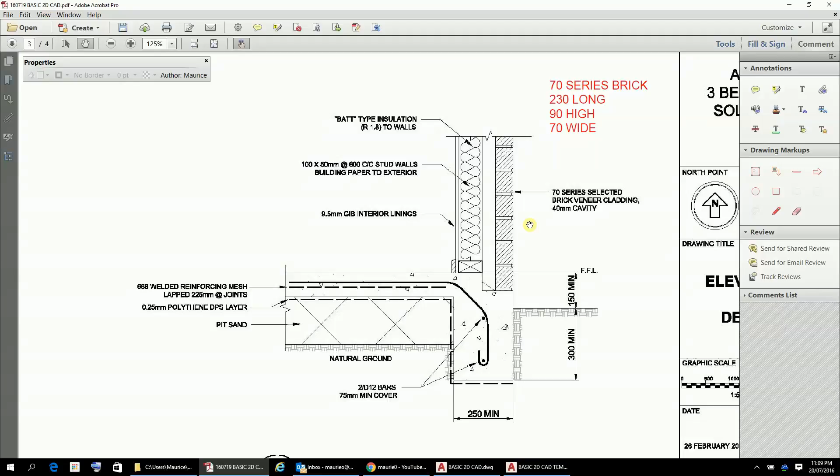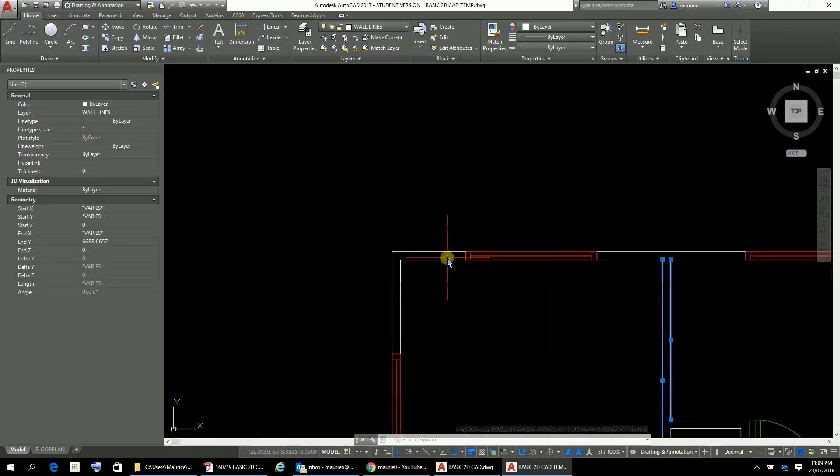So we need to start getting that into our drawing now, and here's our drawing. All right, so where to start? Probably we could look at our cavities here, and let's just see how we go. So let's just go offset, enter, and to do the cavity we're going to go with a 40 mil cavity. So there's 40.

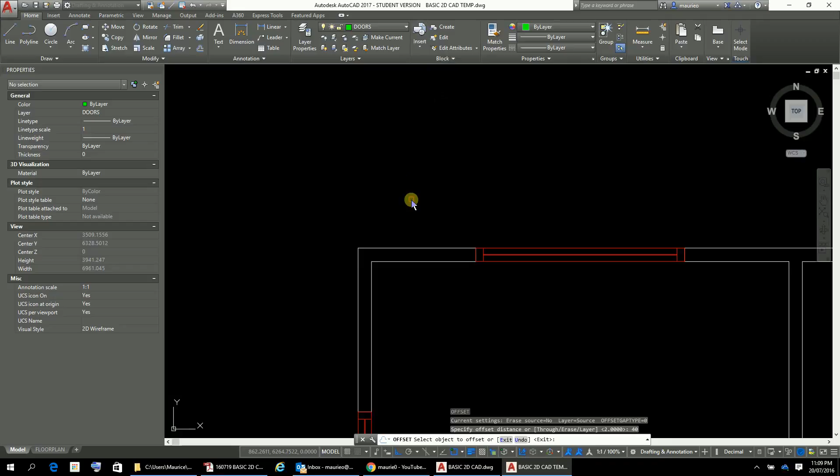Oh, before that, we don't really want our cavity in the door layer. So just before we start, let's start a new layer, and let's call it the brick layer, B-R-I-C-K, and we'll double click that, okay, and see how it's assimilated the properties of what was there. So we've got to watch that.

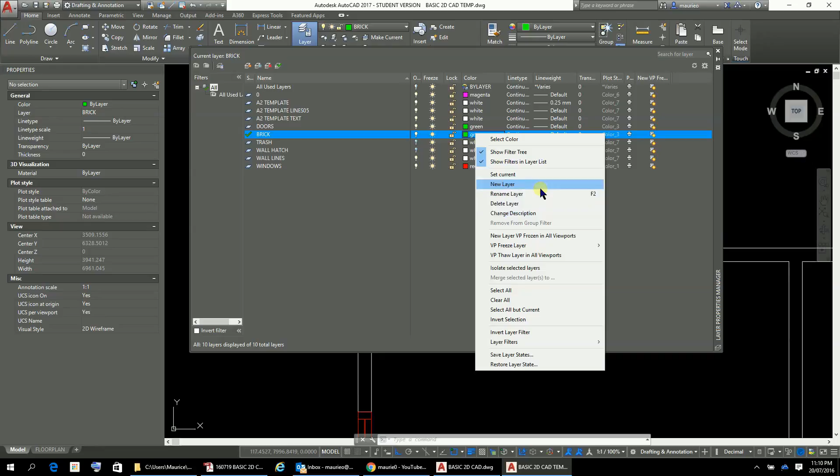So in terms of a colour for this, on black, a fairly strong colour is yellow, maybe, for our bricks. I really recommend that you just stick with these colours along here. They're the main ones. So let's just go with the yellow. So that's going to be our bricks. And we're going with the default line width there.

Okay, all good. So now, of course, when we offset, the offset always assumes the properties of the line that it offset, but we can soon sort that out anyway. So let's go offset, enter, and we've got 40 there. So that's our cavity there, and there's a cavity there, and we'll just deal with what we've got and get something going here like so.

So that's the cavity there that we're going to have, and now we've got to work out some way of dealing with that. So I imagine there's some sort of situation with the bricks and the cavity here. So we'll just put a line in here, we'll make that part of the brick layer, and we can decide what's going there.

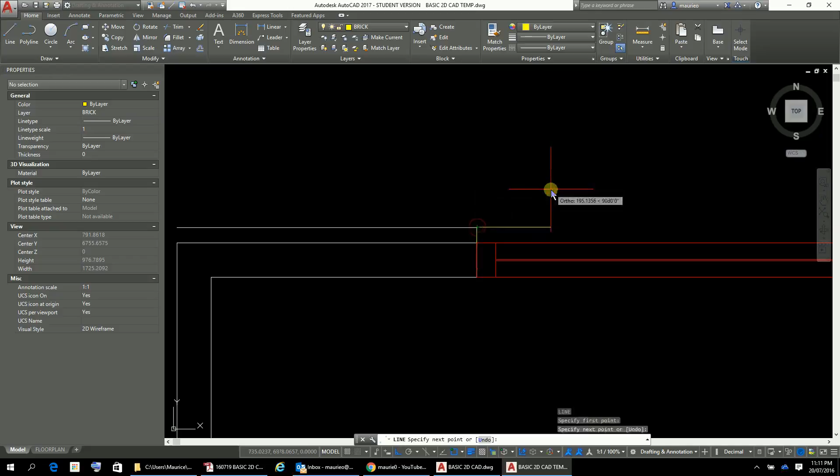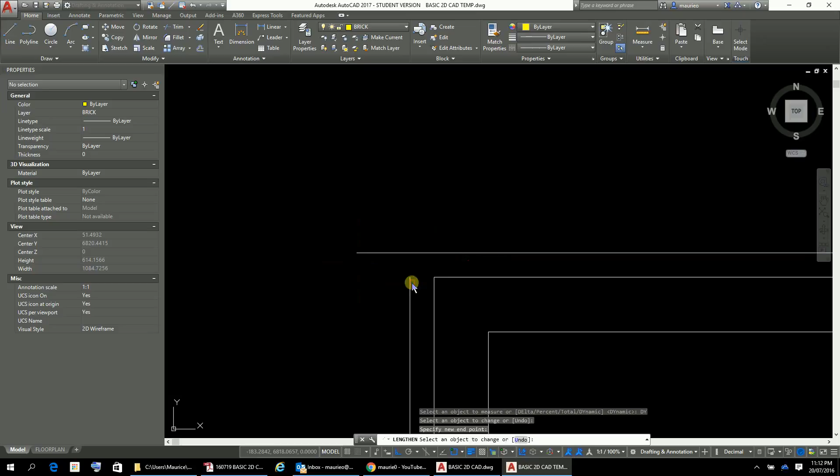Okay, so now we need to lengthen these ones, LEN, remember that, len and DY for dynamic, so we can just put these out here like that, and that one out there like that, and we'll just put a line across here, escape, line, which is going to be that one there.

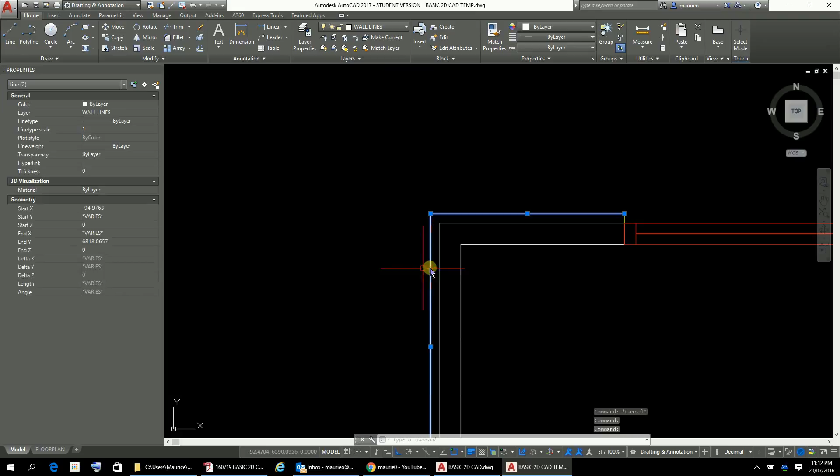Okay, and now let's just go trim, and let's trim out those two there. All good. Let's make these into our brick layer. So I'm assuming that what happens at the end there will be part of the brick. So let's just change that to brick. That's going to be our bricks in there.

And then we've got to offset that by the 70mm width of the brick. So offset, enter, 70, enter, and we'll just go there, there, there and there, and again we've got similar problems, line, enter here, like so, and line, enter here.

Then extend all that, len, dynamic here, so let's just pop that out there like that, pop that out there like that, and then let's just go trim like so, and boom, that's pretty much getting our cavities there as to how it's going to work. Things are pretty straightforward most of the way around.

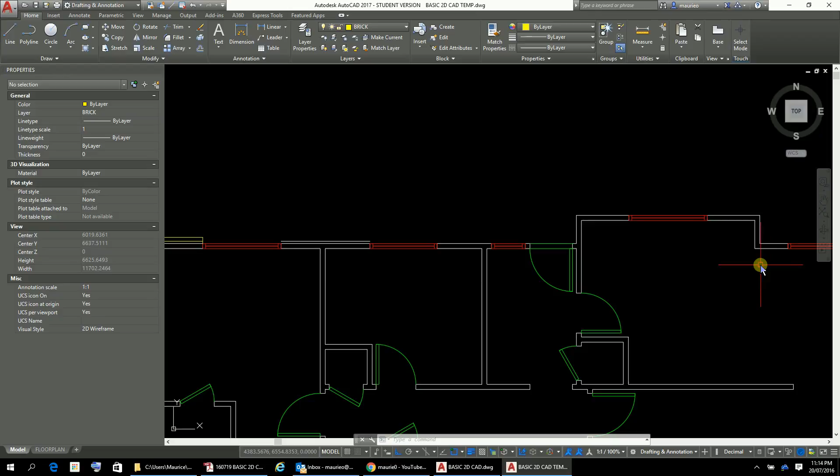Just remember that up here at the kitchen, the brick stops here, and this area here is in a Linea weatherboard. So at this stage we're not showing anything particular there, we're just showing the brick cavity, and we're leaving that as a push out to the roof line.

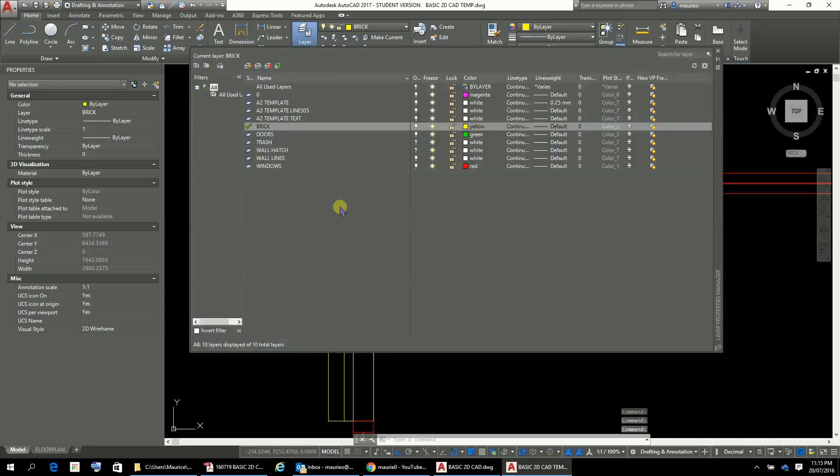So that's our cavity there, and then within that we want to put a hatch in there. Now these hatches can become pretty tricky, but what I'll do is, we've still got the brick, so I'll just create a new layer called the brick hatch. So let's just create a new layer there, and we'll call it the brick hatch.

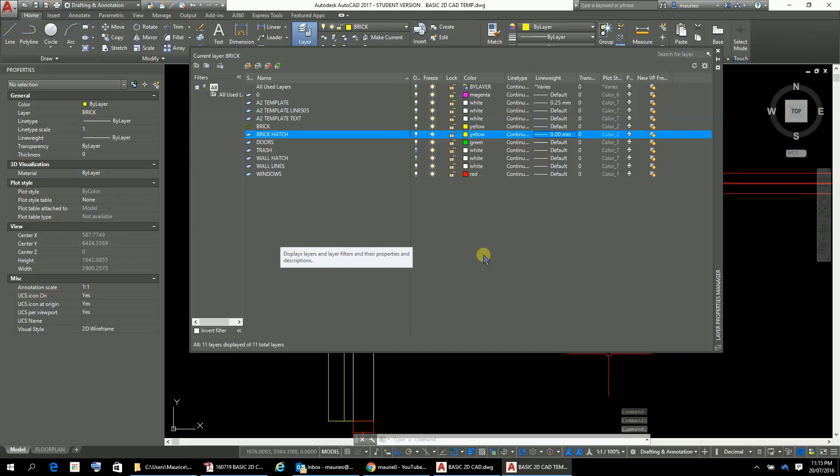The brick hatch. I like to get a real thin line for those. So for the brick hatch in that layer, I'm going to have a 0 there. So that should be a very skinny little line in there for the brick hatch. Okay, and then I'm going to make that the current layer, and then get rid of that there.

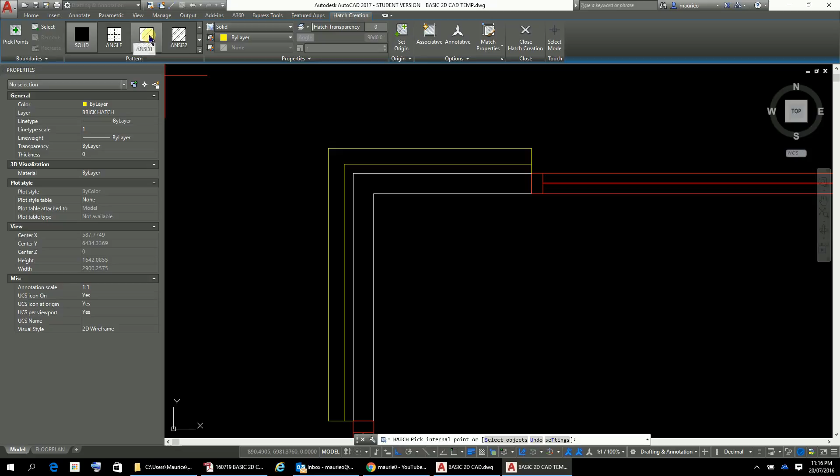So we want to put a hatch in here, and it's pretty much like a 45-degree line. So let's go in here for hatch, and let's see if we can select a hatch. So that's probably the one that we want there, that little hatch there, and we'll just click in there. And as you can see, the lines are a bit skinny there, and so what we need to do is to work on the scale of it.

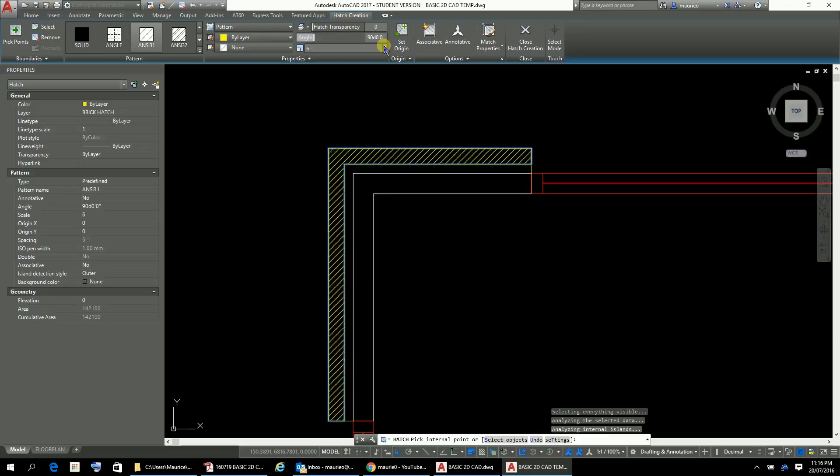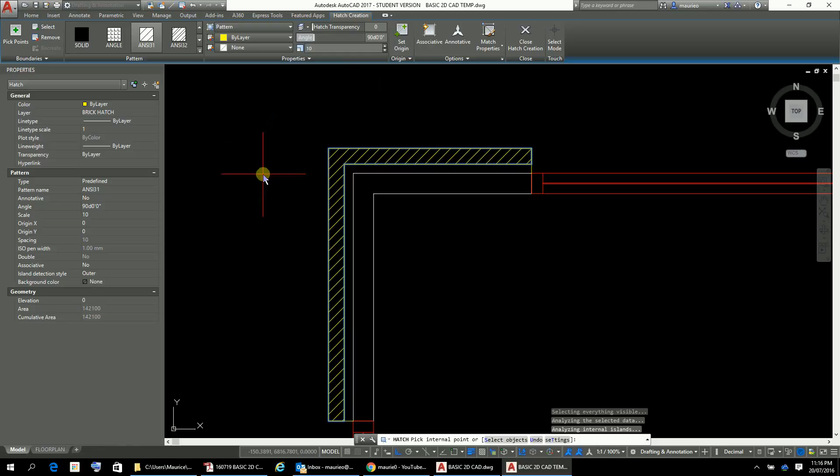So I'm going there, and you can see it's getting fatter. So if I just come in here and just hold that down, you can see that it's getting better and better and better. I want to maybe go with, I don't know what 10's going to look like. Just working on the scale here. I think that's probably pretty good there. So I'm going to take that, and so that's going to be my scale for that. It was 10. Let's go enter, and there we've got our nice little brick hatch all in there.

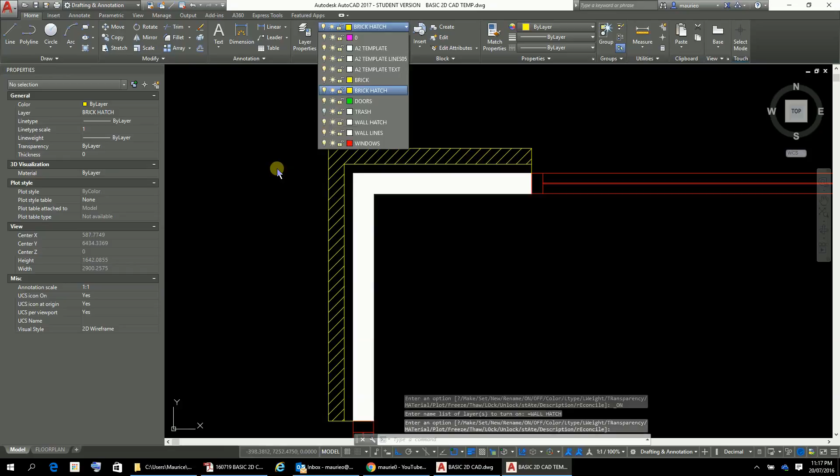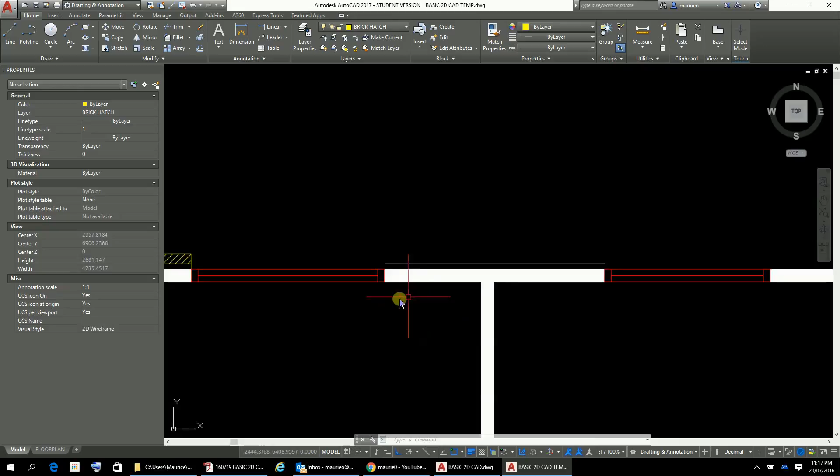Now might be just a good time to turn on our wall hatch as well. I probably keep the hatches turned off because it enables us to quickly identify the line. So that's a hatch done there. And you'll also note, oh, that's a cavity there. So I might just very quickly do that cavity there just to show you what's going on. So that's going to be offset 70 for the bricks. Put that in there.

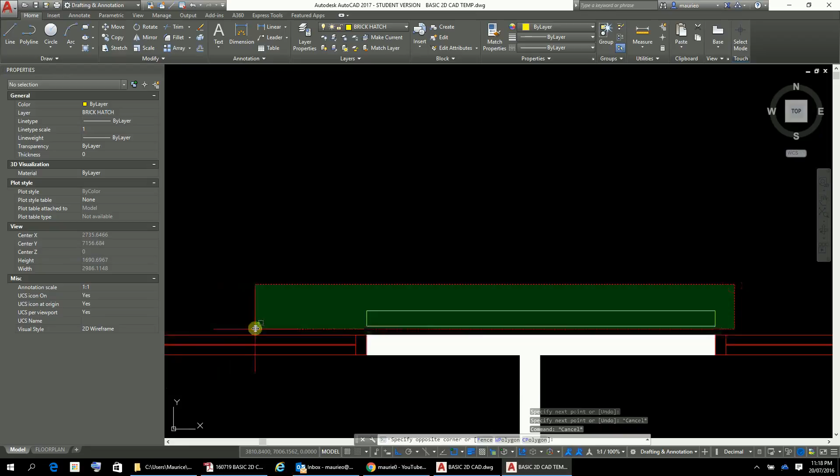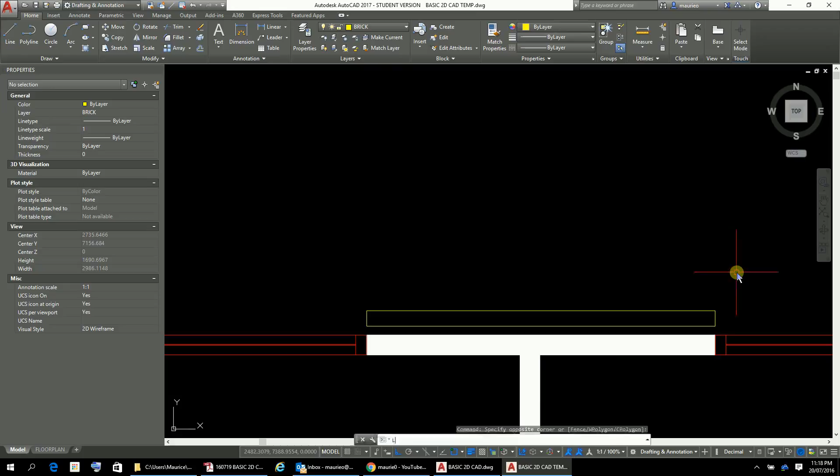Okay, and let's just put a line in there, and a line in there. Now we actually want that not in the brick hatch layer, but in the brick layer. That's the brick there, and I'll just change to the brick layer at this point in time, and we'll just draw a little line in here and another little line in here just in the brick layer. These could be in perhaps some other layer or changed at another point, and I'll just do a line here across the window that essentially represents the window sill within the bricks, like that there.

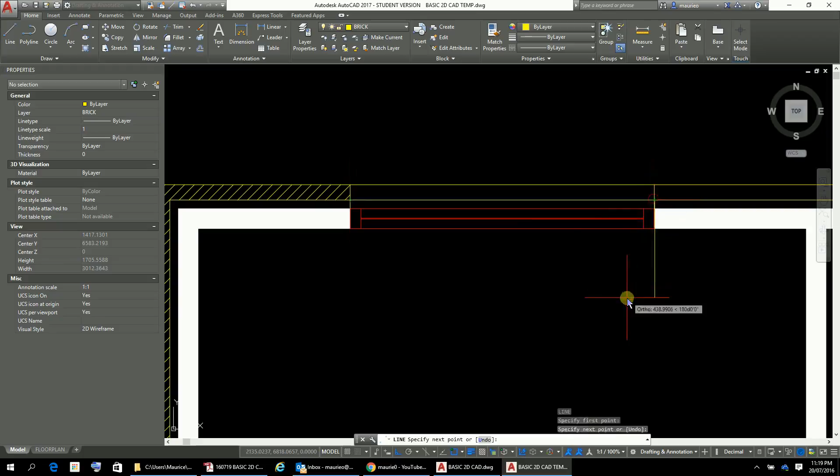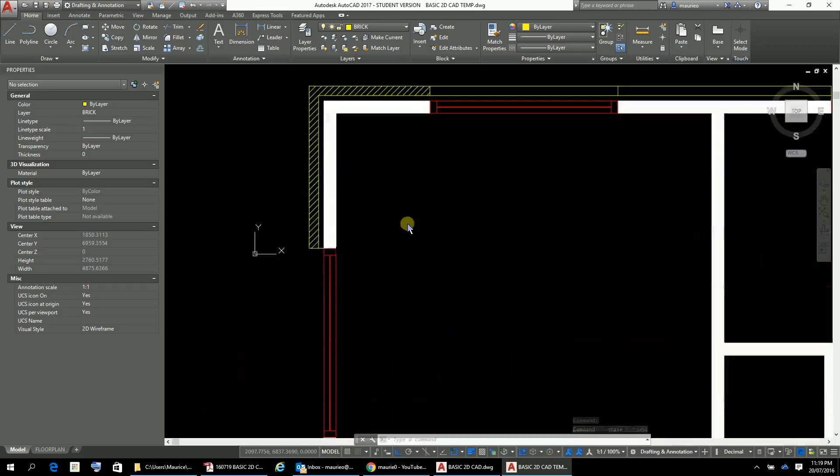And we'll also put another line in here. Well, perhaps that can go in there like that, because with the cavity, there will be bricks under that, and I'm actually going to delete that line there. I think we can leave it like that, so we know that they've got that little bit of a cavity going on there. That's probably the easiest. So let's just leave that like that. Okay, and we can probably leave that one out as well, so we don't need those. Delete like that. So that's the window, and then we'll just take that one out of there as well while we're here.

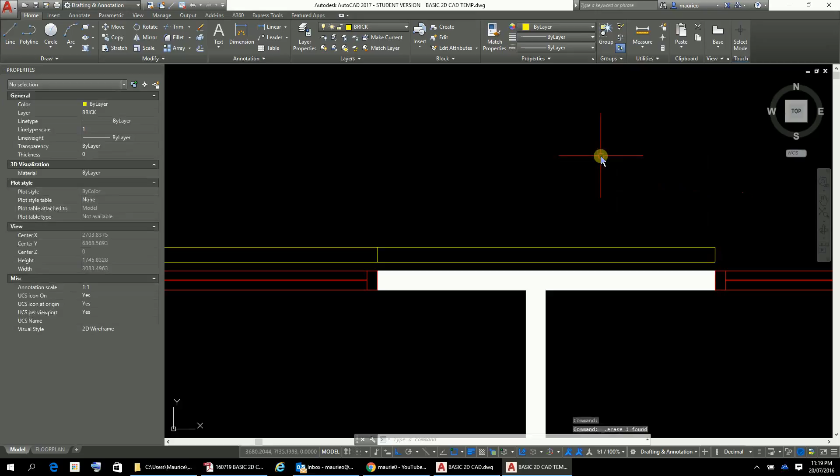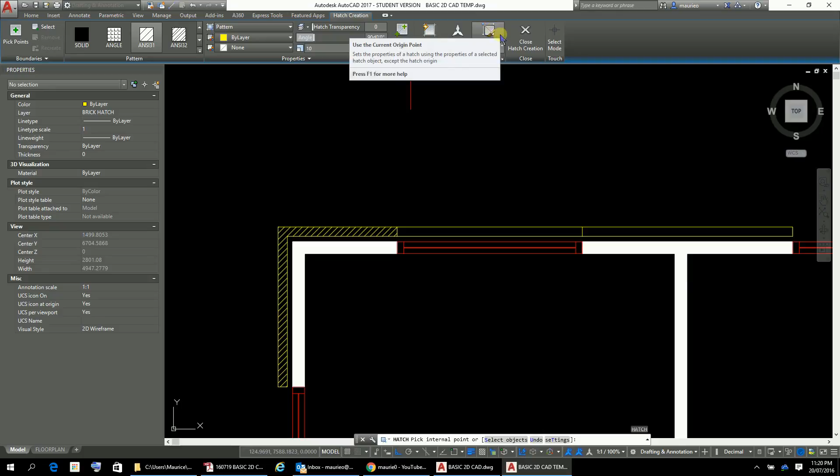So just doing a little bit of this on the hoof, and then we'll just go to our brick hatch there, and then we can go H for hatch. Now there's a thing in the hatch here where it says match properties. Use match properties there, so we can... no, that's not going to work. Okay, so let's go H into here, and we go into there. Oh, and it's sorted it all there. That's all good. And escape. That's all done. So that's how it looks around the window situation there.

No, I'm sorry, I've changed my mind. I'm going to take that line out of there, and I'm going to just put a little line in there, like so. No, I'll keep it like that because the cavity will be there under the window at some point, and yeah, just leave it like that, just to show there. That's fair enough. I'm going to leave it like that.

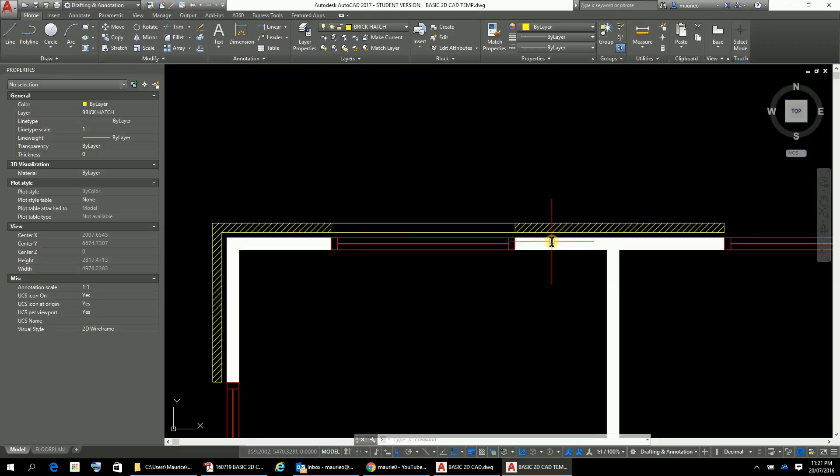Okay, so sorry I've gone over a little bit here. In the break before the next video I will be putting in the brick and cavity, and then when we come back we should have that all done, and we'll probably spend a little bit of time putting the roof on. So that means we've got our house all closed in, so to speak, and then we can move inside and start putting the furniture in and doing the bathroom, laundry and kitchen.